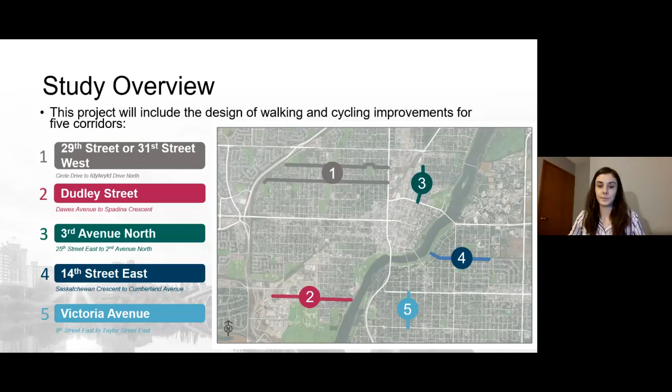So the Neighbourhood Bikeways project has been completed through 5 phases of work. We started with an existing conditions review of all of the corridors back in February. Then in March, we started the first round of public engagement, where we heard your concerns and considerations for all of the project corridors. Next, corridor designs, and really started to look at what these bikeways would look like. Next, we had the second round of public engagement, where we are presenting the designs for your feedback, and that's where we are at with Victoria Avenue. And then in the winter of 2020 and 2021, we are working on the final reports.

So for the designs for these corridors, we were focused on all ages and abilities, or AAA cycling facilities. AAA cycling facilities are safe and comfortable for people walking and cycling, regardless of their age or ability. There are a range of AAA cycling facilities that exist, and for this project, we focused on 3 of them: neighbourhood bikeways, protected bike lanes, and multi-use pathways.

So the first facility that we looked at was neighbourhood bikeways. These are shared roadways where cyclists ride in the middle of the street with vehicles, and they have low traffic volumes and speeds to be comfortable for cyclists of all ages and abilities. Traffic calming measures may be required to help reduce those traffic volumes and speeds, and on-street parking is generally not impacted with this type of facility. To be comfortable for people of all ages and abilities, traffic volumes should be less than 1,500 vehicles per day, and operating speeds should be about 30 kilometers per hour or less.

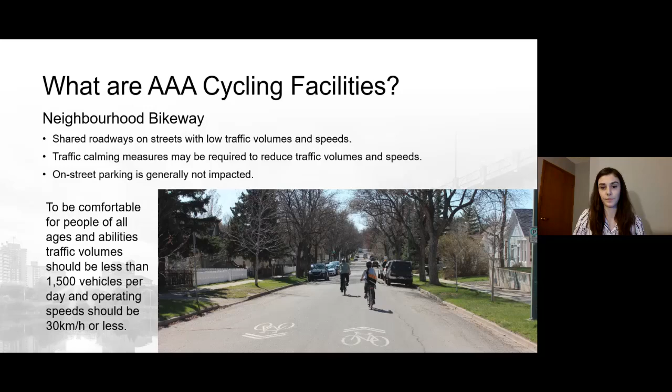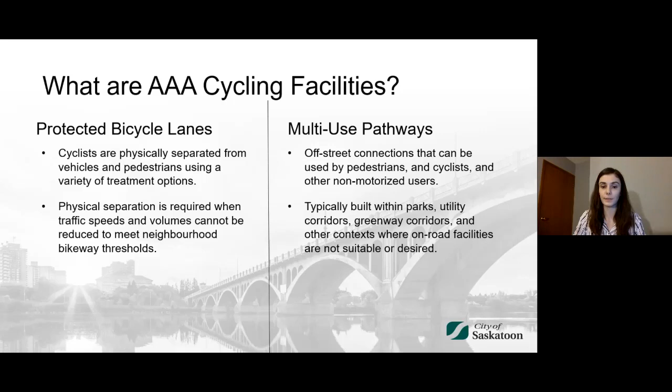The next type of facility that we looked at was protected bike lanes. With protected bike lanes, cyclists are physically separated from vehicles and pedestrians using a variety of treatment options. This separation is required when traffic speeds and volumes cannot be reduced to meet that neighborhood bikeway threshold. Here we have one example of a protected bike lane, a raised cycle track that you can find along Victoria Avenue north of 8th Street.

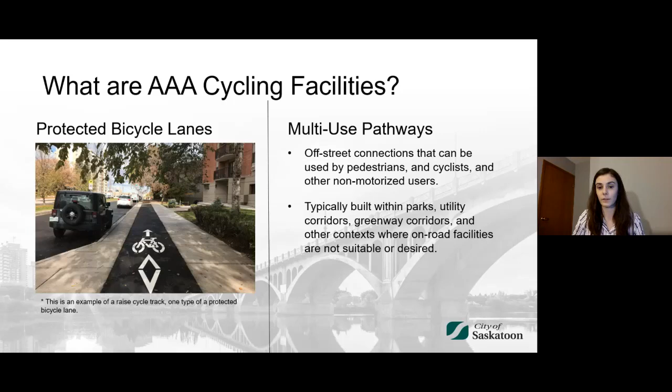The last facility type that we looked at was multi-use pathways. These are off-street connections that are shared by pedestrians and cyclists and other non-motorized users, and they're typically built within parks, utility corridors, greenway corridors, and other contexts where on-road facilities are not suitable or desired. Here we have one example of a multi-use pathway that can be found along River Landing.

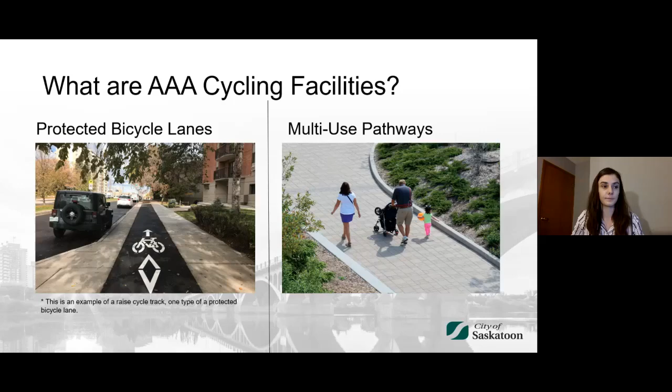So when we look at Victoria Avenue, you'll see our study area for this project highlighted in yellow. We have 8th Street, the northern section of our study area on the right side of your screen, and Taylor Street on the left, which is the southern boundary for this project. Saskatoon's active transportation plan identified Victoria Avenue as a AAA cycling route. There are roughly 4,000 vehicles that travel along Victoria Avenue every day between 8th Street and Taylor Street, and sidewalks exist throughout the corridor.

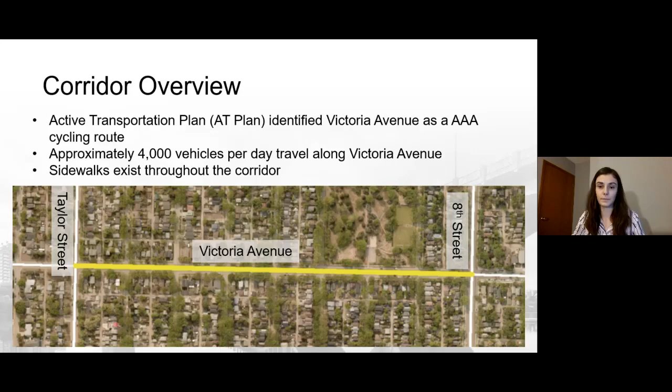What we heard about Victoria during the first round of engagement was that the trees along the corridor are very important, and the mature trees that exist in the boulevard next to the sidewalk are more important than the younger trees in the median. We received suggestions to continue the Victoria Avenue raised cycle track south of 8th Street through this portion of Victoria, and to narrow the center median to make room for both protected bike lanes and to maintain parking.

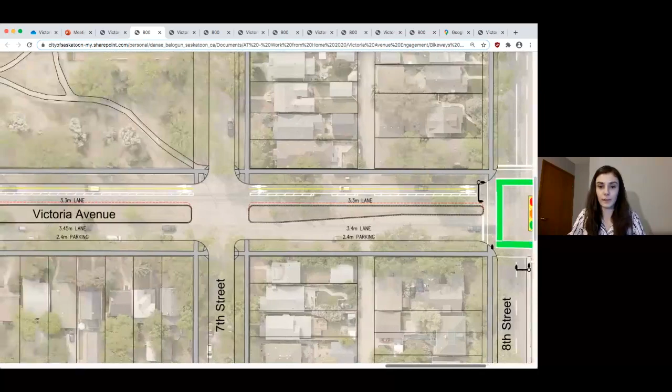At Buena Vista Park and 6th Street, we are recommending a raised crosswalk. The Buena Vista Neighborhood Traffic Review found that there were some speeding issues along Victoria Avenue. Through that project, we recommended a curb extension to help reduce speeds and improve the crossing from 6th Street over to Buena Vista Park. With our design options, those curb extensions would no longer be an option, so we are considering the raised crosswalk to help with this crossing.

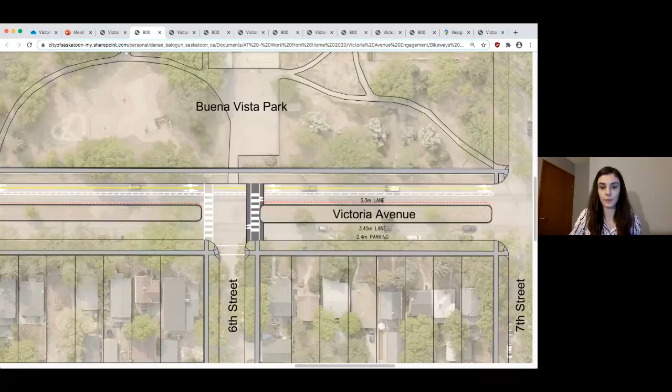As we continue south towards Taylor Street, you'll see there is a red line along the median. This is just indicating that the median will need to be narrowed slightly with this option to make room for the driving lane and the bidirectional bike lanes. With this option, all of those trees in the median would be maintained. And again, parking would be removed from the west side of Victoria, but it would remain on the east side of Victoria.

And continues all the way to Taylor Street. Our next option, option number 2, is protected bike lanes at street level. With this option, we would remove parking from both sides of Victoria and have protected bike lanes in their place.

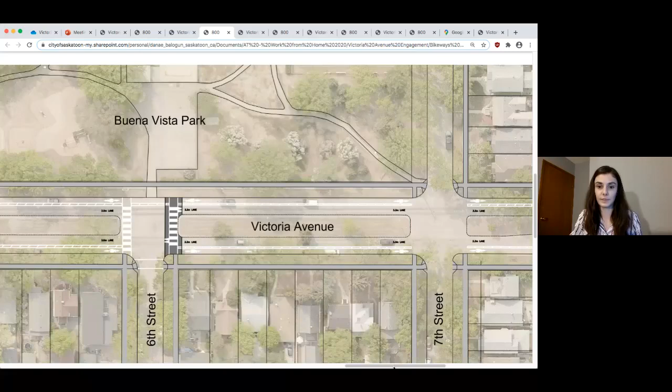When we move over to the map view for this one, again, starting at 8th Street, we have a nice transition across 8th Street to this facility with our protected bike lanes on either side of Victoria, continuing south towards Taylor Street. We again see the raised crosswalk at 6th Street to connect to Buena Vista Park.

With this option, all of the median trees would be maintained. We wouldn't have to narrow the median with this option, and parking is removed from both sides of the street, and our bike lanes stay at street level throughout the corridor. This will continue all the way to Taylor Street.

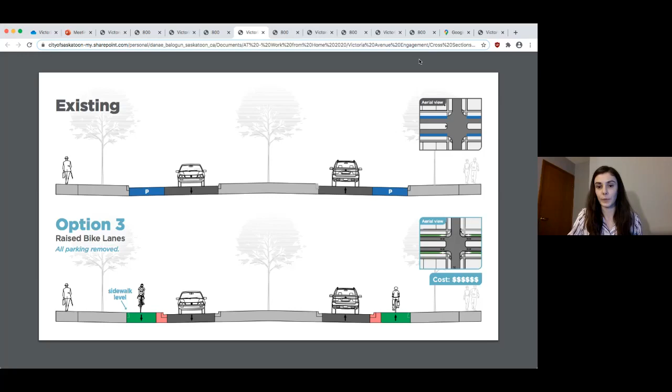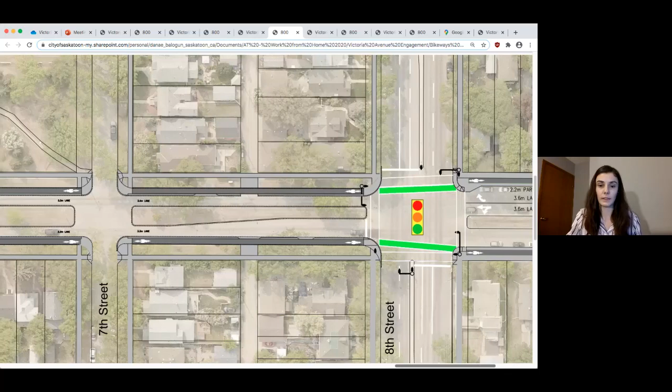Our next option, option 3, is very similar to option 2, but with option 3, we are looking at raised bike lanes, again removing parking and installing the raised bike lanes in place of the parking lane. So when we move over to our map view, we can see the raised bike lanes adjacent to the boulevard in place of the parking lane. And this will continue south to Taylor Street with our raised crosswalk shown again at Buena Vista Park.

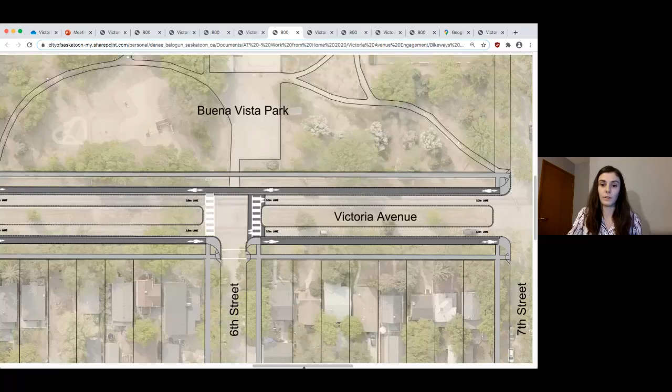With this option, all of the median trees are also maintained and parking is removed. With the raised cycle track, cyclists will have to ramp down to street level at all of the side streets. And again, at all of the back lane crossings, there isn't space available for vehicles to make those turns with the raised cycle track at that sidewalk level. So cyclists would be ramping down at those points.

Our fourth option, option 4, we looked at narrowing the median to make room for street level protected bike lanes and to maintain parking between 7th Street and Taylor Street. So once we move over to our map view, we'll see that parking has been removed for this first block between 8th Street and 7th Street. With the existing turn lane, there just isn't space to maintain parking and narrow that median anymore to have parking on both sides of the street and the bike lane with this option. Sorry, that was just to 7th Street, right, Carly? Yes, just to 7th Street.

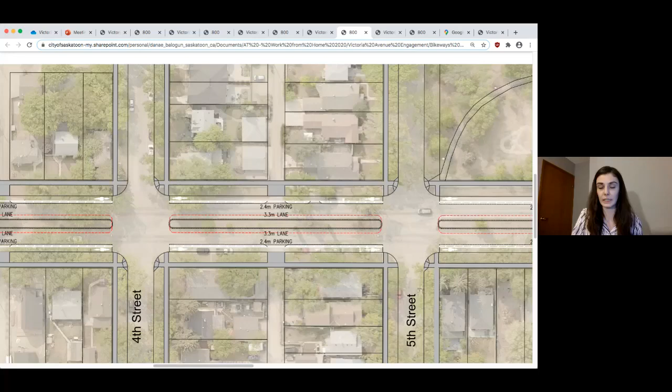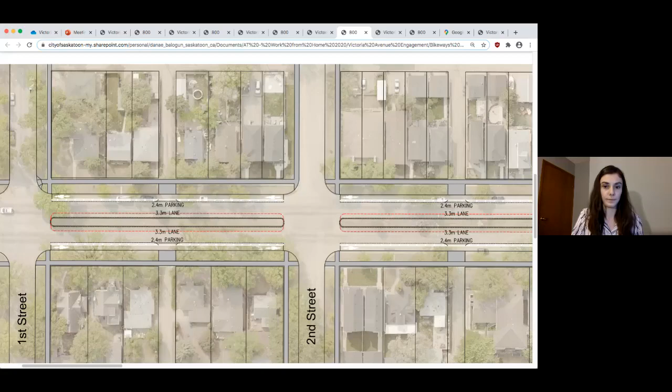As we continue south of 7th Street, we narrow the median so that the parking lane is maintained. We have the raised crosswalk at Buena Vista Park. And with this option, the dashed red line is showing where the existing median is, and the black line shows where the new median would be. And with how much the median is narrowed, all of those trees would be removed. This option is at street level, so cyclists would stay at one level throughout the whole corridor, continuing to Taylor Street.

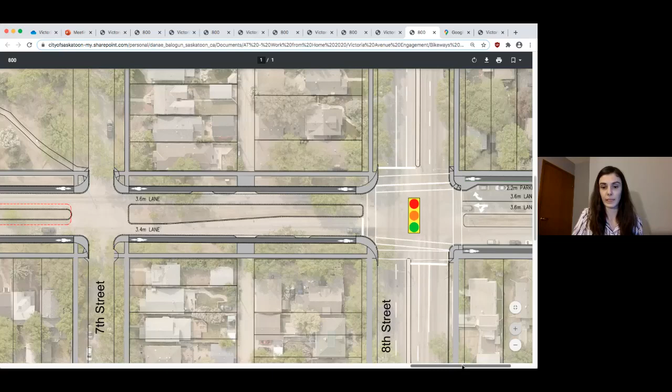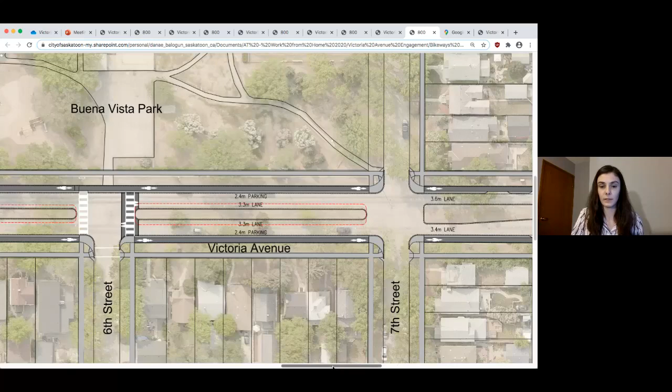And then moving to our last option, option 5, we again narrowed the median to make room for a parking lane and looked at raised bike lanes throughout the corridor. So when we jump over to the map view, we again would have to remove parking between 8th Street and 7th Street with this option. And then south of 7th Street, looking at narrowing the median to make room for that parking lane and the bike lane. And we also have the raised crosswalk again at Buena Vista Park.

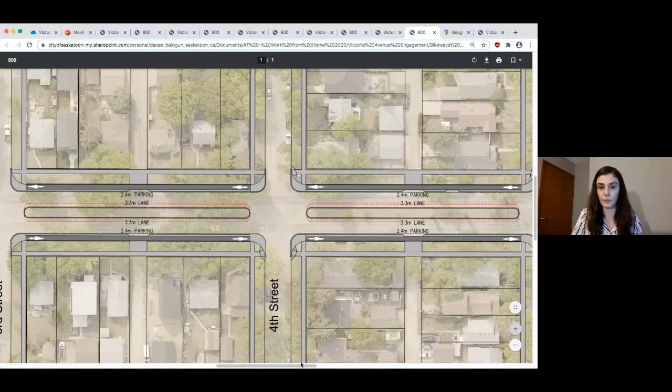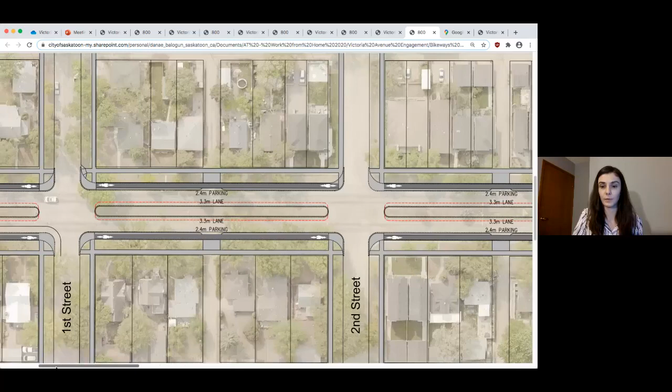With this option, all of the median trees would also be removed due to how narrow the median gets. And cyclists would have to be ramping up and down at the side streets and at those back lane and driveway crossings. So the red line is showing where the existing median is, and the black line showing where the new median would be with this option. So we will just jump back over to our PowerPoint.

As that's just loading. So here we have a little bit about how we evaluated all of these designs. The full evaluation table was too large to fit into this PowerPoint, but it will be available in the final report. So here's just some highlights of the things we looked at when we evaluated these options.

So we looked at whether or not parking was maintained, whether or not the median trees were maintained, if the bike lane was at street level, which would be a little more comfortable than the raised version for this section of Victoria with how much it has to ramp up and down. And we looked at how comfortable the transitions would be at either end at 8th Street and at Taylor Street, and some initial high-level cost estimates.

So after we evaluated these designs, option 2, the street-level bike lanes without parking, scored the highest. They provide a comfortable AAA cycling facility. However, parking is removed throughout the corridor.

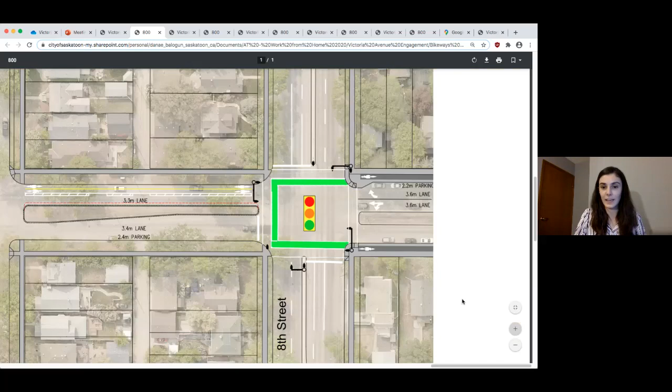The first question is, can you please describe how option 1 will integrate well with the existing cycle track on Victoria? I'm assuming they mean north of 8th Street. So they're discussing that transition at 8th Street and Victoria Avenue. Yeah, so we'll give Danae a minute to pull back to that intersection. So here you can see at 8th Street, we have the green paint noted on our drawing for a little bit about where cyclists would be crossing.

So if you're traveling south towards Taylor Street, it would just be one crossing across 8th Street with that traffic signal. If you're going north towards the traffic bridge, that's where it would be a 2-stage crossing at 8th Street. Once you got to that corner of Victoria and 8th Street, you would then cross to the east side of Victoria and then again north over to the raised cycle track. So this one, not as nice as the other options, because when you are going northbound, you have to cross 8th Street twice to get over there.

Okay, thanks, Carly. The next question is curious about how snow removal is taken care of in each option. Yeah, it's a great question. So with snow removal, we do have equipment available that can clear all of our cycling facilities. So it's a smaller little device or tractor style thing that can move down all of those bike lanes. And there is some buffer space with our raised ones where that snow can be stored as well.

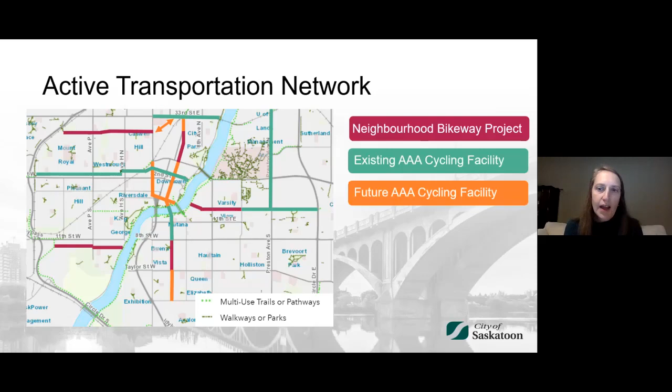The next question is, what type of median or barrier is used for option 2? The downtown bike lane bollards are unsightly. It would be nice to see something that looks better and can be maintained. Yeah, so with option 2, we would be looking at some concrete curbing to separate cyclists from the driving lane. So it would look like a short concrete barrier.

I'm just reading these in the order that they come, so we might have to go back and forth between options a little bit, Danae. Sorry about that.

The next one is a comment. Bikeways without parking should not be an option. We pay very high taxes and a lot of houses do not have off-street parking options. Thank you for that comment. Yeah, that's why we're here to get your feedback. We knew parking was very important to the residents right along Victoria Avenue. So thanks for that feedback.

I walked down Victoria Avenue from 8th Street to the bridge this winter, and some of the bike lanes are covered in snow. In winter, with all the snow we have, which narrows most streets, how do you plan on keeping the bike lanes cleared, especially if it is a raised bike lane? So I'm not sure if we answered that with the initial snow clearing question. I'm hoping that we answered that earlier. Should we repeat the answer just in case they missed it? Sure.

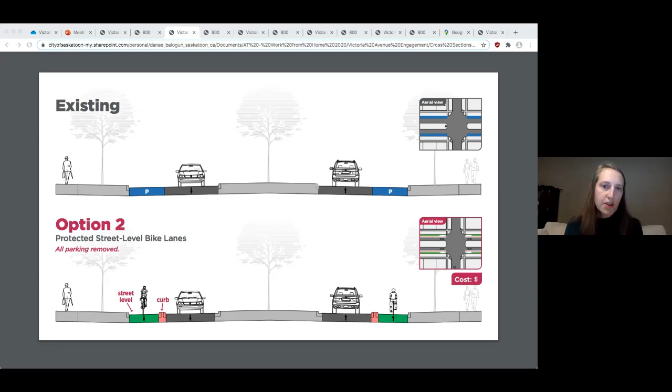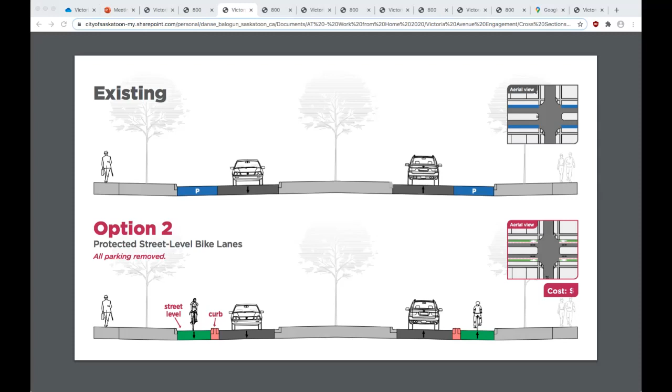How do these options fit into the extensive curb and median work that was done on Victoria this summer? Yeah, so we are aware of the work that has taken place. Some of these, such as option 2, wouldn't affect any of that existing curb work. This option doesn't affect that curb that was done. With some of the other options that are more extensive, like 4 and 5, we are looking at narrowing that median, so that curb work would be redone.

So we're just going to jump in here. I think we might have lost Natalie. I don't know if anybody else is having some challenges to hear her. So I'm just going to jump in, moderating the Q&A here. Bear with me while I figure out where Natalie left off. So I'm just going to start at the top here.

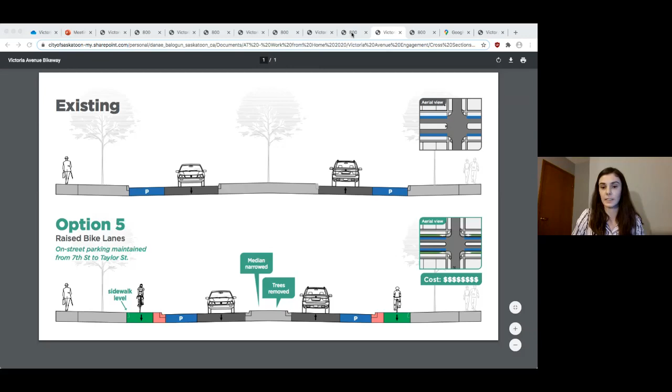Question: can you comment on if raised crosswalks / bike lanes could be included on the sidewalk level bike lane options? Yes, so with all of the options, the raised crosswalk would still be in place. How cyclists get over that raised crosswalk at 6th Street does vary if it's street level or raised. So with our street level bike lanes, cyclists would actually go over that raised crosswalk just like the vehicles would.

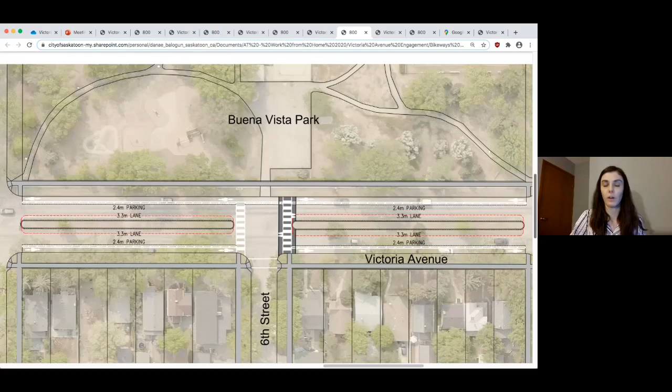But with the raised cycle tracks, they would actually stay at sidewalk level as they cross it on the west side. On the east side, there would still be that ramp at the corner, just like as if they were going up it.

Great, thanks, Carly. Another question. When is the soonest that this project can be funded and constructed? So once we take our report to committee and have our recommended design, we will then be looking at funding options, presenting that to council and looking at if there's any alternate funding sources available. Once we have funding secured, we would then be looking at construction.

Thanks, Carly. Another comment, it would be easier to build a bike lane through the park than on Victoria. I think we've answered that already, but Carly, if you just wanted to touch briefly on the conflicts at parks and bike lanes. Yeah, so because our parks are more of a recreational facility and we have a lot of people there just enjoying the park, that conflicts a little bit with some of our commuter cyclists that are traveling through the park to get to a destination. So we do try to separate our cyclists at that point. Constructing a separate path through the park would also be difficult since a lot of that space is already allocated.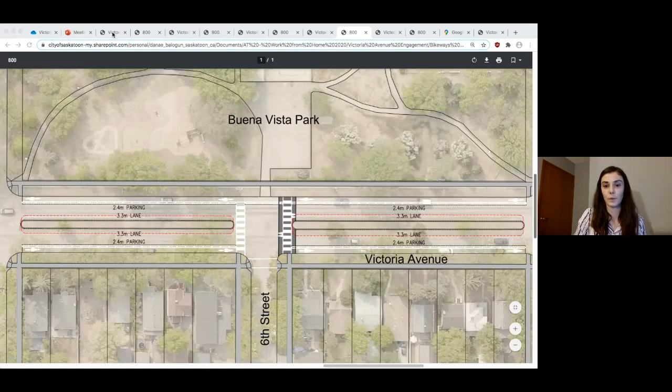The next question is, how can you offer options without parking for homeowners? Where do you propose people park and plug in during the winter? Yeah, so we looked at providing multiple options to get feedback on, because we understand that parking is important. So there are options for parking off of your back lane if you have a garage where you can park. Some of the options, such as option 1, we're only removing parking on one side, so you might be able to park on the other side of Victoria. It's a little difficult if you need to plug in, and some of the side streets as well have some space for parking.

Yeah, and just to add to that, it's part of our responsibility to consider all options and evaluate the impacts, and then present our option to council. So that's why we included them. At the NTR, there was a lot of opposition to losing parking to a Victoria bike lane, especially with houses fronting the street. Is a mixed option plan with some parking kept possible? So I think you just answered that, Carly, with option 1, which maintains parking on the east side of the street, and that's the one that has some parking.

We are in an infill area and losing parking is unacceptable as the side streets are full of parking already. Thanks for that comment. Seems like we're hearing that recurring theme tonight. Many residents from Victoria Avenue seem to be attending tonight, and that's great. We want to hear your feedback and your opinions on these options so that we can present your position to council.

How are these networks being coordinated with other city projects? For example, Victoria south of Ruth is on the priority sidewalk list, and the road and median were totally redone this summer between 8th and Taylor. Yeah, so we are aware of some of the other city projects. We do look at the asset preservation map for where they are working. The original timeline for this project was to have our second meeting, which we're having tonight, back in May, but due to the COVID-19 pandemic, our engagement timeline got pushed. So that also affected our ability to look at anything this summer.

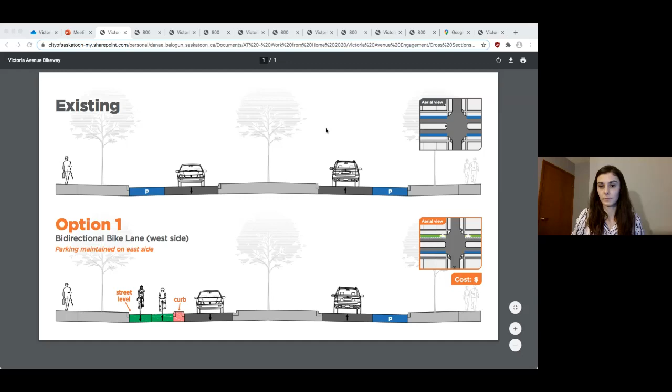If the median is narrowed as outlined in options 4 and 5, what becomes of the median? Is it just a narrow concrete median? Is it landscaped at all? So with options 4 and 5, if one of those options was selected as the recommended design, once we move into the detailed design phase, we would look at if there's any options for some vegetation or green space in that area. Maybe not a tree, but maybe something smaller, or it might be hardscaped.

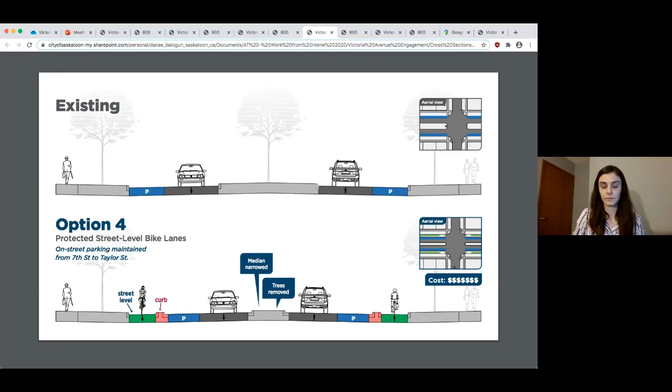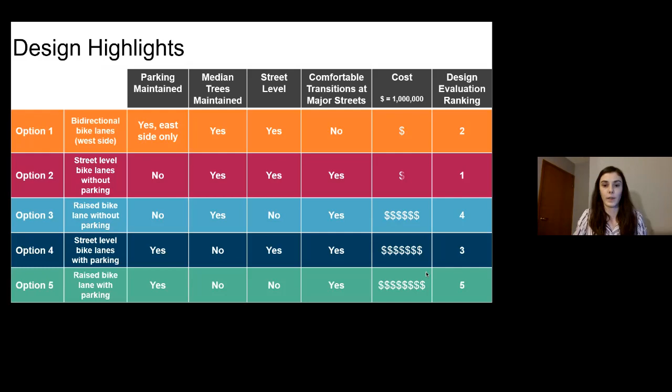Okay. How did the ranking of the options come about? I basically agree with the order of them, but curious how that decision was made. I'll just give Danae a minute to pull up our simplified evaluation table. So we looked at a few different things, one of them being the impacts to parking, since we know that is important, and also the median trees. Knowing that those are two very important things for this corridor, the options got points if parking was maintained or if those median trees were maintained.

We also looked at the comfort of the facility, so those options that are at street level. We also looked at some of the different driveway crossings and street crossings. So option 1, because it is on one side of the street, some of those conflicts are a little less since you're only dealing with vehicles turning one way. And those are some of the factors, and just kind of the overall impact to the street.

Okay, so it looks like we're back to a couple parking questions. Where would we park, seeing as the side streets are already very congested? When Victoria is being cleared, we have to walk a long distance to park. Will that be how it always is without parking? So yes, I think the intent would be that you would park on the side street or in your back alley if you have some parking back there for those options.

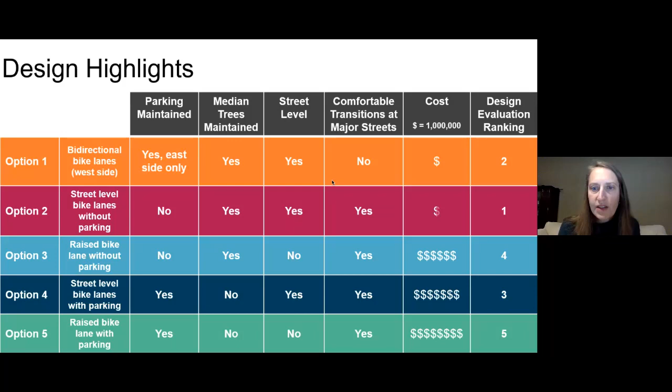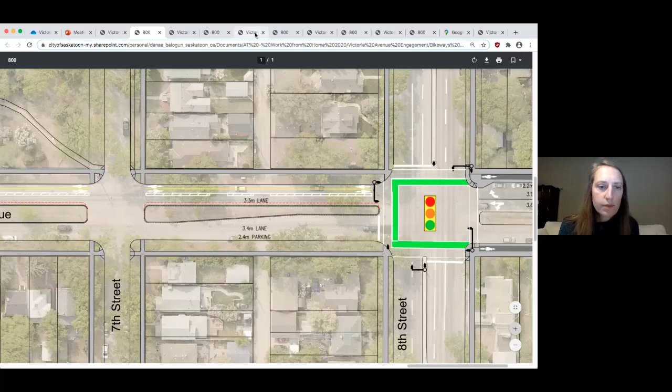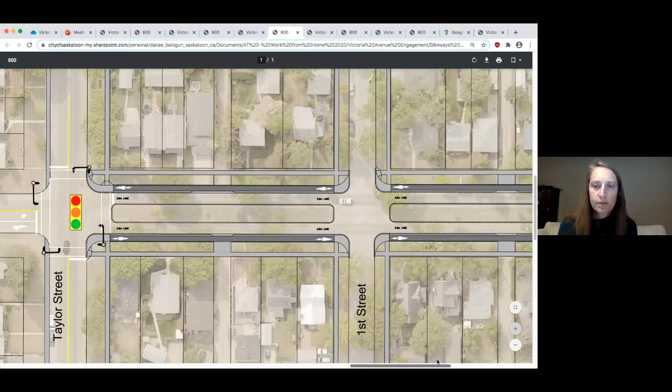And then one question, are there any driveways facing Victoria? How would they be integrated, in particular with the raised lanes options? Yeah, so there are a few private driveways along Victoria, about one or so each block on each side of the street. With these options, a lot of those driveways are close to the back lane. So the raised cycle track would ramp down for those driveways and stay at street level across the back lanes before ramping back up. So it would still be that one ramp down and back up. It wouldn't be twice within one block.

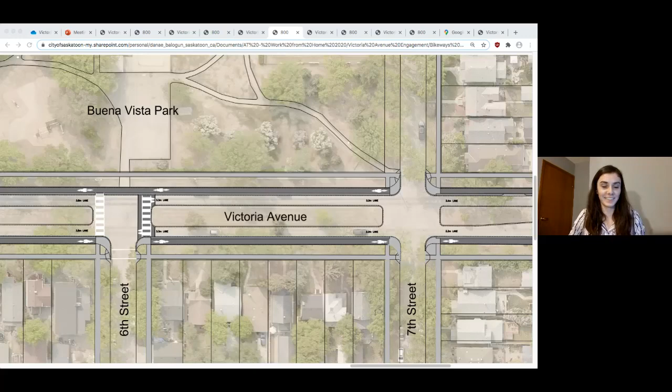Do you have on hand the number of driveways there are, Carly? I don't believe I have that number. I have some other numbers. I don't think I have that one. Yeah, it's not many though. It's like less than 10, right? Yeah, if I recall.

So someone's responding to that back alley parking comment. We face Victoria and the alley has a power pole and gas meter that would have to be removed for access. Will the city pay for this so we can have a parking option? As far as I know from my time at the city, the city does not pay to relocate utilities in back lanes to accommodate access to properties.

The next one's a comment. This is a great initiative, some challenges, but very important for active transportation in our city. We agree.

I'm surprised the city is considering spending $1 million or more for 8 blocks of bike lanes and removing parking spaces. The city keeps growing and 99.999% of the population drive vehicles. Spending $1 million for 8 blocks of bike lane for 0.001% of the population seems excessive. Most people ride bikes for only 5 months of the year.

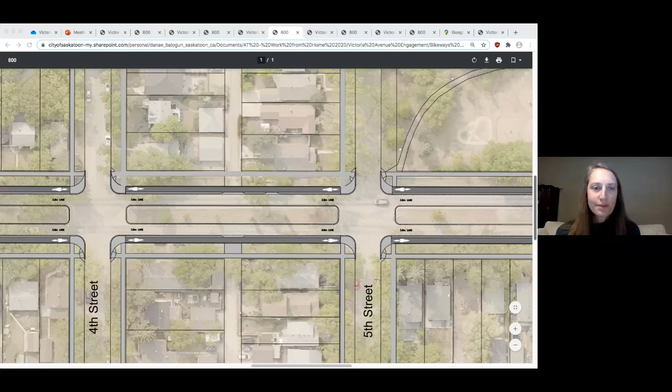So we have been directed to come up with an all ages and abilities cycling facility on Victoria Avenue. So that is what we have looked at, and we've developed a few different options that would provide that AAA facility on Victoria, as was recommended through the AT plan.

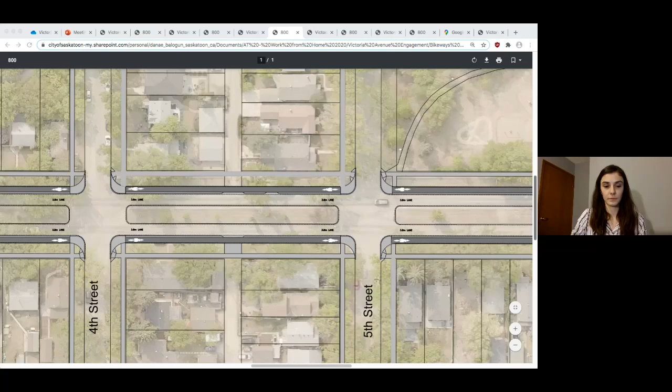There's another question for Danae. Sask Crescent from 8th to Taylor is a AAA cycle facility, but all sharrows have faded away and there is essentially no cycle infrastructure left. Are there any plans to maintain the bike lane on this street? Crescent from 8th to Taylor.

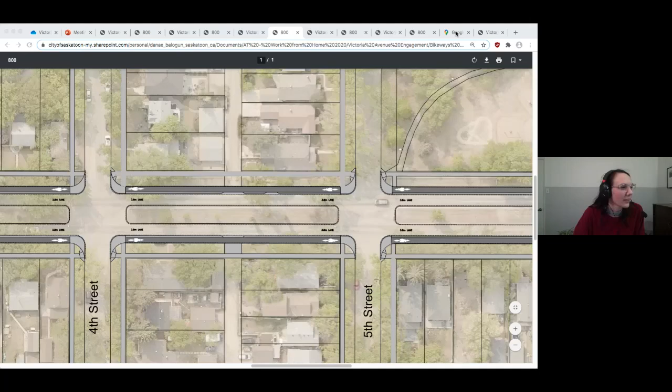Thanks for the shout out, the specific shout out. I have to admit, I'm gonna have to look at a map here. My brain is not in map mode. It's in moderating mode. So sorry, Saskatchewan Crescent from 8th to Taylor. So we're talking about in here.

So I believe what you're referring to, and please in the comments correct me if I'm wrong in my assumption, is that Sask Crescent West is signed as a bike route. And so I believe in our cycling guide, it probably comes up as an option for a lower volume street that may be more comfortable for people cycling. I don't know if there were sharrows. I don't think there have been sharrows on Sask Crescent in the past, to my knowledge, although please do correct me if I'm wrong.

But yes, it is signed as a bike route and as part of our cycling network. There are a number of streets in the city. If you've traveled around and you have an eagle eye, you can spot those little green and white bikeway or bike signs. And Sask Crescent does have a few of those.

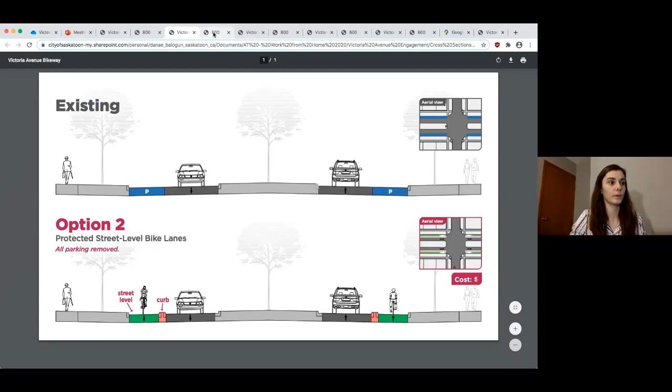And then a question. There's often blind corners with fences for cars leaving the alleys, and it can be dangerous for pedestrians and also cyclists. Will any of these designs incorporate measures to make these alley crossings safer? Yeah, so with these designs and having the bike lane kind of in the street where the parking lane currently is, that does push cyclists a little further out to help provide a bit more visibility for people leaving those back lanes so that they can see them before they are there. So there's a little more free space in the boulevard so that it's not blocking those bike lanes.

Have the planners already made up their minds on the option? Will our opinions and concerns really be considered? Will Melrose and Eastlake actually be considered as alternative bike routes? So we will be compiling all of your feedback to be presented to council, all of your comments. And we are here to hear. We have developed some options, again, some that remove parking, but we know that's important, which was why we looked at options that could also maintain parking and present you with all of the options instead of developing them and cutting them based on our own thoughts. We also want to hear from you what is important for your street.

Yeah, and I think related to the Eastlake and Melrose comment, we don't want to prevent cycling on those routes. We want to provide safe cycling on Victoria. So that's why we're talking about Victoria. Cyclists are still welcome to use Eastlake and Melrose, but Victoria has that connectivity, as Carly mentioned earlier, over to the downtown and further north, all the way to 33rd Street multi-use path. It's the most direct route, and that's why it was recommended in the Active Transportation Master Plan.

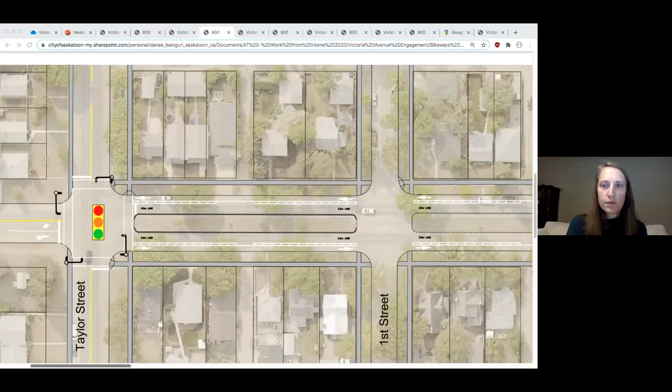Yeah, so to add the raised crosswalks through the side streets, it would create a lot of challenges for drainage on the street since a lot of our streets do drain to those corners. And it would also increase the costs quite a bit to address the drainage and to raise those crossings. So it wasn't something that we looked at.

Have the residences on Victoria been polled for their specific input? So we sent the flyer for this project to everyone along Victoria, all of those residences within 150 meters. We did not ask for a specific poll, but we did notify them of this event and our first round of engagement in March. Yeah, there was also a mini billboard in the corridor, I believe, as well, right, Carly? Yes, there was a mini billboard placed on Buena Vista Park along Victoria.

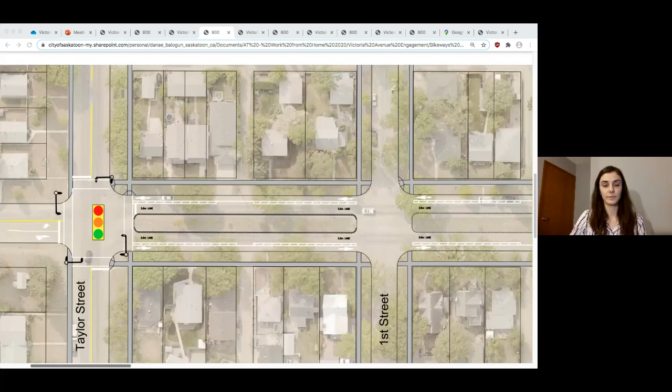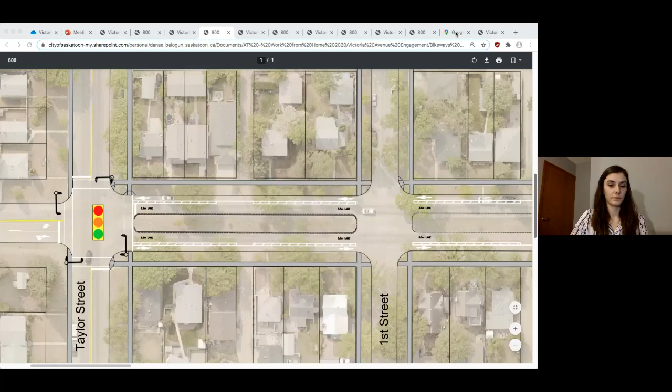I realized that people said that trees are important, but the easiest option, which is not listed, is to just continue what was done on Victoria between 8th Street and the bridge. Take the grass boulevard next to the sidewalk between 8th and Taylor and put the bike lane there. Plant trees in the center boulevard to replace the trees lost that were next to the sidewalk. I see Danae's taking us down to Street View. That's good. You can kind of see what they mean, if it'll load.

Yeah, so through this section of Victoria, there are a lot of very old, 100-year-old elm trees adjacent to the sidewalk that would be very difficult and expensive to remove. There's also some power poles on the west side of Victoria in that boulevard space in the few blocks where there aren't trees, which would create additional issues with trying to put a raised cycle track through that section. So with that, we looked at the younger trees being in the median, and we thought it would be easier to possibly replant some of those trees if they were removed from Victoria.

Okay. How many cyclists are currently biking on Victoria? Is this guaranteed to increase with the bikeway enough in regards to the expense of it? So one of our goals of the active transportation plan is to create a complete and connected cycling network throughout Saskatoon. So the current volumes of cyclists aren't always a great indicator of future demand once we have a facility in place, not just on Victoria, but also access to some additional destinations. And as we continue to build our network, it'll be easier to get to different places by bike, and we can see cyclist volumes increase throughout Saskatoon, not just through this stretch.

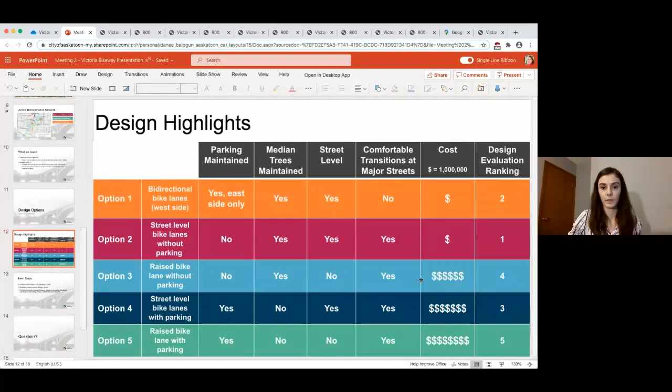And then somebody's asking, did you share when the decision would be made and when the chosen option would be completed? So I think you had some rough timelines in your next step slide. Yeah, looking at spring 2021 would be when we would take this report forward, and we'll provide details on how you can subscribe for updates, and we will be sending out an email to that email list once we know when that project is on the agenda, so that you can tune in to that meeting.